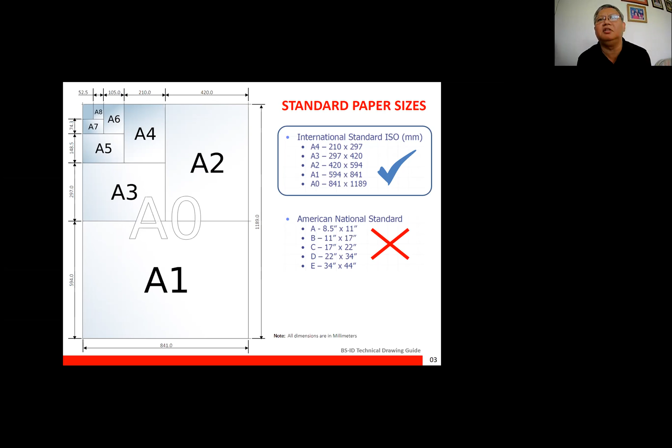Okay, sige. So, anyway, I guess you have seen this guide already. So, iba sa inyo, naging student ko before. So, anyway, this is just a review. Okay, so we'll start out with the standard paper. For your understanding and review, the standard that we are using right now is ISO.

Mga techniques that Prof used to teach American ASME, American Society of Mechanical Engineers. Okay, kasi yun yung mga available books. But there are already standards when it comes to ISO. Wala lang books that teach technical drawing using ISO. So we would have to combine those guides.

So since the Philippines is using ISO as a standard, if you were able to talk or communicate with the Bureau of Product Standards or BPS, they're using ISO. Okay, so pagka tinanong mo sila, they'll basically inform you that for the Philippines, our standard is ISO. Kaya yung mga paper natin, A4, A3, A2, A1 at saka A0.

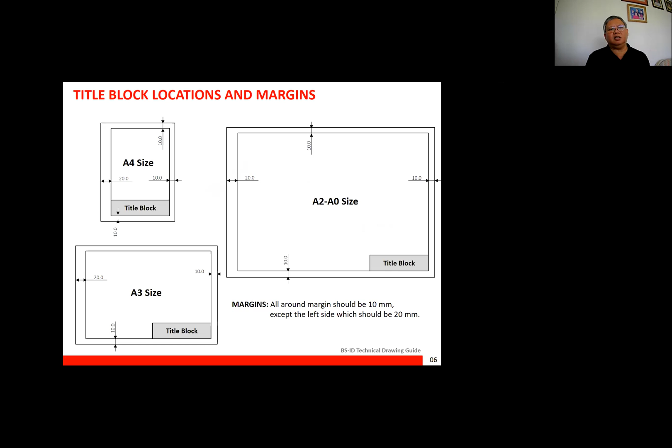Okay? So next is yung standard title block natin. For the standard title block, we have basically decided this already within the school parameters, because of course, as an institution and also as a requirement by CHED, dapat meron tayong mga ganitong guides or manuals when teaching para hindi nalilito yung mga students, so lahat ng technical drawing lessons is isang klase lang, one type lang, walang differences. Okay, so we were able to set these standards as the contents of our title block.

And as a requirement sa mga contents na to, there are minimum requirements of ISO like the institution name, dapat nakalagay yan dyan, and also the name of the designer, then the type of document, dapat meron yan, may part number. Then of course we have to include other contents like yung student number, yung section, at saka dapat may nag-a-approve ng technical drawing. So in this case, your advisor or your professor in drafting. So if I were your professor before, makikita niyo siguro pinipirmahan ko talaga ito or meron akong stamp ng signature; I always made sure na these are all signed properly. Ibig sabihin na check ko siya.

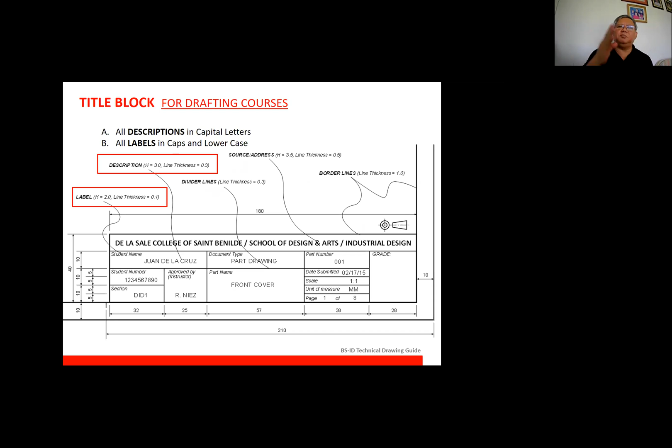Okay, so pages 1 of 8, meaning ilan ba talaga yung total number of documents? Like in your case, sa thesis, ilang pages ba lahat yon? So yun yung 8. Halimbawa, 8 pages lahat. Then may page 1, page 2, page 3. Okay? So it's not used to spread out your drawing in different parts. Dapat when we say one drawing, dapat isang drawing lang per part. Walang part 1, part 1A, part 1B. Walang ganon. So just remember that.

And yung grade, we use this for manual drawing. Okay? And of course, reminder when it comes to the thickness. So may standard thickness ito, yung mga line. So yung borderline natin, ang thickness is 1 millimeter, including the border of this title block. Okay? So ito yung sukat niya, 180 millimeter, di ba? So yung label, may mga height din siya. We have to be particular when it comes to the height.

And of course, for the labels, it can be italic. Separate it from the description. So ito yung mga description. And all descriptions should be in capital letters as mentioned here. So yung labels will be capital and lowercase. So ito yung sukat sa left side, and ito yung sukat ng distinctions. Then this one, yung symbol ng third angle projection, we will discuss that later.

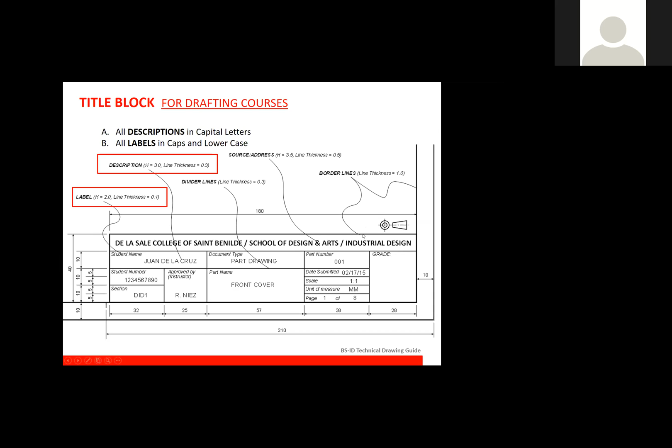Okay? And this is for, as I said, drafting courses. For thesis, we will just move this. Yung grade, malilipat dito sa portion na to, we'll just move everything. And yung grade dito sa right side, mawawala; yung space na yan will be moved to the left to include the Benilde logo. Okay? So it is important for us to have that Benilde logo as a standard.

So ang nilalagay dyan sa technical drawing is yung logo ng institution. Hindi program, hindi yung group or something. It has to be the institution. Okay? So yun lang magiging difference doon. Still, the institution name should be here, up to the department. So naka-slash lang siya, School of Design and Arts and Industrial Design. Okay? So wala pang questions?

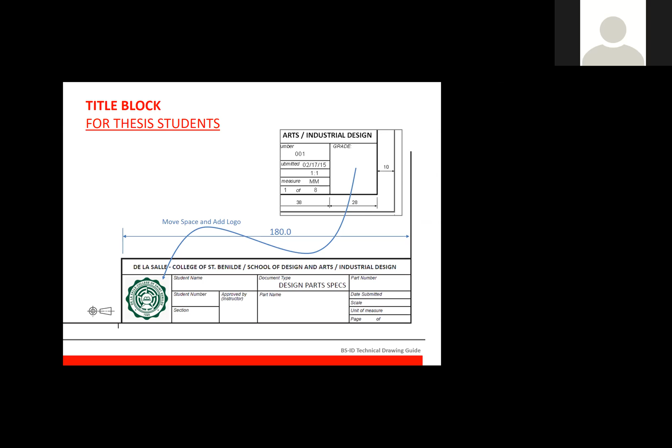Okay, kung wala pa, wala pa? Okay. So we'll just proceed to the next ano. Okay? So after the title block, we'll go to the line types, no? So this is basically standard.

And when you draw, meron tayong tinatawag na yung object. This is referring to the object, no? So there's an outer visible line which is 0.5 in thickness and inner visible line which is 0.3 in thickness. Okay? So ito yung line thickness. So when you use your CAD, you can define the thickness ng points. Or sometimes it is a measurement, no? It's 0.5 millimeter or 0.3 millimeter, then 0.1 millimeter.

Okay? So if you look at this drawing on the right side, yan yung outer visible. Completely external lang, no? So lahat ng outside, this is one way of defining the entire object. So anything that goes beyond that object is already not included in the object. So it could be a description, it could be a label, or it could be another representation of a part. Parang ganun na siya. So it has to be confined with the outer visible. So other details inside will be the inner visible.

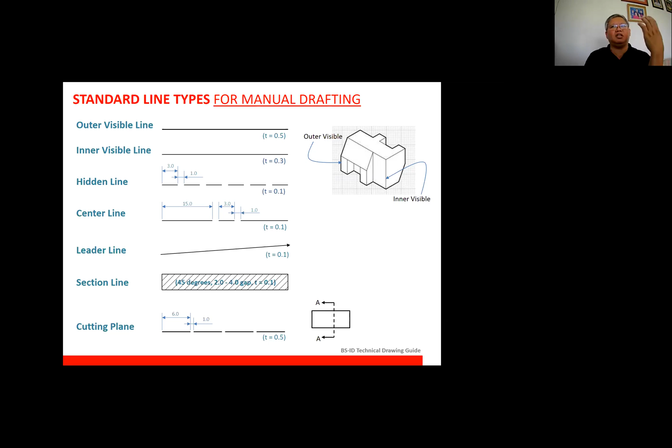The next is dimension lines, which is really important. So for the dimension lines, on the right side, this is for manual drafting. But if you set it with a solid arrow, even just like this - why we do this in manual drawing is because just by defining the thickness as 0.3 and the dimension line is 0.1, it becomes solid at the end, so it can be easily seen. But if you're using CAD, wherein the arrow is already a solid triangle, you could basically use that already. This is just for manual drawing.

So just to identify the parts, this is your dimension line. This is your dimension text, the 15 on top, and this is your extension line.

There's standard spacing for this. Considering this is our object, the dimension has a minimum distance from the object, which is 10 millimeters. That's it - just 10 millimeters. And the extension line should have a gap from the object, which is from 1.0 to 1.5 millimeters. There should be a gap, it shouldn't touch.

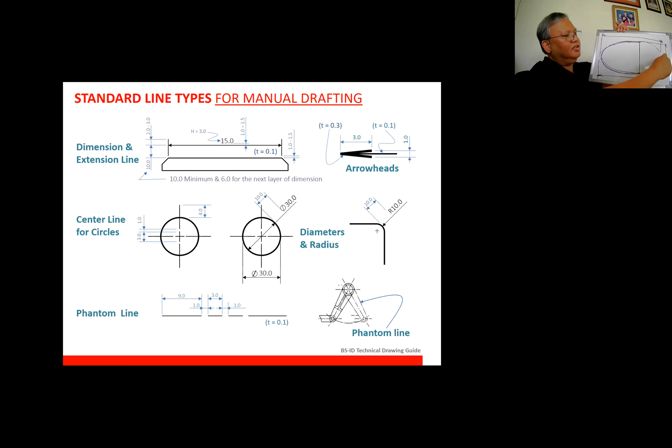Did you get it? Because our object is only this actual part. So for you to be able to generate this ellipse, you need to put a measurement here. You need to add a measurement there. So this line should be a reference line or a phantom line. But your object is only this one. For you to put the measurement or dimension, to generate the complete ellipse, you have to complete the drawing using reference lines.

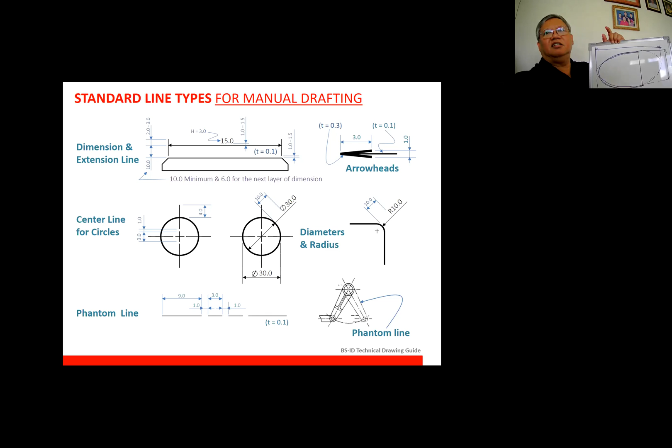Did you get it? Yes sir. So that is one of the purposes of having phantom lines or reference lines. Okay, so if there are no questions here, let's proceed.

So our standard paper size for thesis, as I mentioned, is A2 size. And this is our requirement. This is supposed to be the requirement for the physical submission of technical drawing. But I don't know right now since it's a pandemic, and I don't know with regards to the requirements if your advisor, Ms. Tani, will allow you to submit a physical technical drawing or just a digital one.

It depends on the guidelines of your advisor or the current thesis group ruling, the thesis ruling, so it will really depend on the thesis ruling right now. I don't know yet, but from the last thesis, they were not required to submit physical copies, only digital. But this is still our standard.

So if you'll submit, it should be in PDF if it's digital, with the front title block, that's it. Okay, these are the contents of it. It has to have a front page, then it's attached to the front cover. If digital, it's like a simulation of the front cover. Then for the contents, these are the contents in proper order.

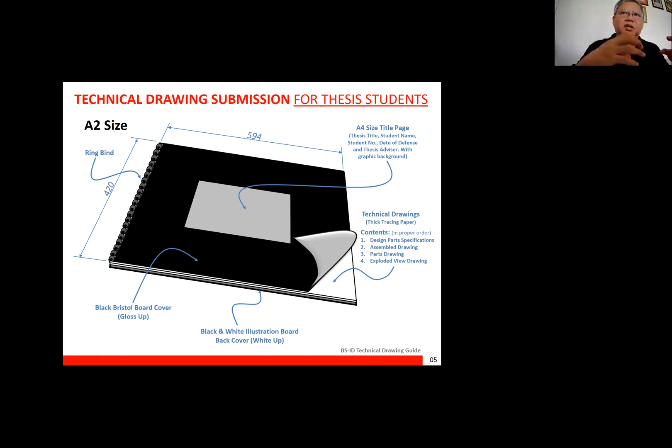Design part specifications, which we will discuss later, these are the contents we'll talk about. Design part specifications, assembled drawing, parts drawing which could be multiple, and exploded view drawing. The assembled drawing is usually just one, but sometimes there are drawings with sub-assemblies, so for you to properly identify those parts, you may have a design assembly drawing for the complete assembly, and another for the other parts. But it's recommended to only have one assembled drawing.

And parts drawing, this is per part. When it comes to part drawing, you're only required to submit part drawings of items you designed originally. If the parts are existing, you don't need to draw it. Just get specifications and part numbers from the supplier, or if you can get technical drawing from the supplier, that's even better. Then the exploded view, which is also required.

So if you are required to submit a physical technical drawing, it should have a Bristol board on top, illustration board at the bottom, then tracing paper in between, and it should be ring bound. A2 size is the standard. This is for thesis students.

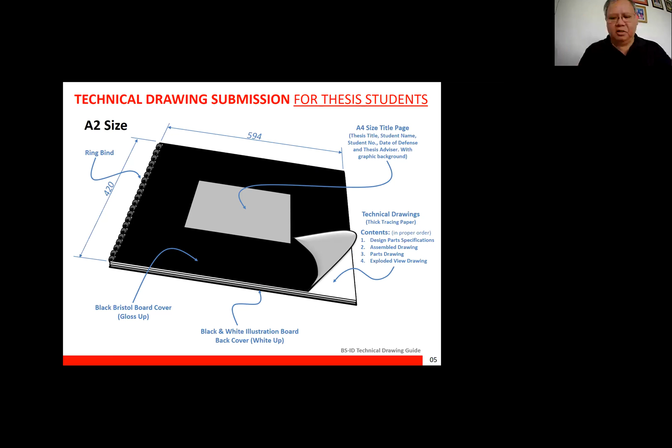Next, no questions here. So anyway, with regards to which is required, please ask your advisor. Ms. Tani is the best person to answer this. Okay, so next is document types.

These are the document types. Design part specification, what is it? It's a document that shows the design specifications of each aesthetic part of your complete product. This could be presented in isometric view of the complete product and exploded view to show hidden parts or parts for assembly to function. This is optional, it depends.

Then parts labelled, described in matrix form. This is for the assembled drawing. Document shows the whole product with parts combined, orthographic and isometric view with minimal dimensioning, meaning it doesn't need to be detailed. Then the part drawing, that one should be detailed.

Document shows details of each part of your product: complete dimensions, sections, details, and descriptions. This is mostly the reference of machinists, fabricators, and molds and dies makers. So it should be detailed.

The details here might be insufficient. Then the exploded view shows how the parts are being assembled. For items with only a few parts, these are placed in the design part specification. You have the whole assembled part and the exploded parts, so you don't have to draw this for simple parts only. But for those with an extensive number of parts, you have to have two: design part specification and exploded or assembly drawing.

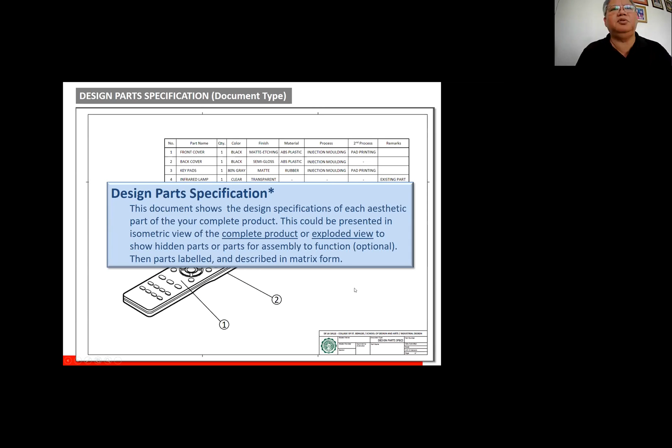What is the design part specification? As I said, it's either a complete product or exploded view, depending. This is the sample, this is the matrix. It has to be identified per part and quantity. So this is the part number. Part 1, part 2, part 3, part 4. This is the quantity per part, because for example the screw, there are many of them, so the quantity can be high.

Then color. Since this is a thesis only, and if you want to impress your jurors, you can put here like Pantone color, process color. It's not just this simple.

Then the finish - of course there are different finishings: matte finish, glossy, etching, sandblasted, mirror, and also transparent or clear transparent. What material is it? ABS plastic, PP, or if it's metal, aluminum, steel, CRS steel - cold rolled steel, or rubber, or any material.

Then it has a process - how it's made - and there's a second process. For the process, like in this case, injection molding. There are many kinds of processes involved. You'll learn that in your industrial studies, the materials. So those are the processes. And the second process is the process on top of this, like for example pad printing, silk screen printing, or if aluminum, there's anodizing, there's painting.

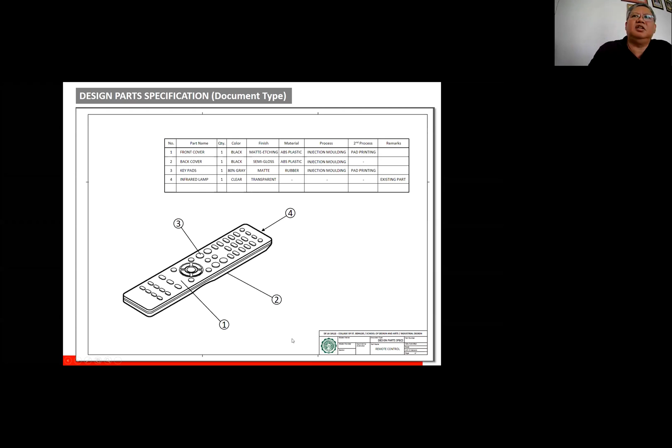So next, what is the assembled and part drawing? The assembled drawing is of your whole part as an assembly, complete, all together - like if it's a wheelchair for example, it's not separated, it should be one whole piece. So the complete measurement, like the height of the seat, that's it - minimal dimensioning only. It doesn't have to be dimensioned completely, but the major parts too, like for example if it's a wheelchair, the diameter of the wheels, just put that. But the details of the wheels, you don't need to specify those - only minimal dimensioning.

It doesn't have to be too detailed because that's only the reference for when the product is fully assembled. Then for the part drawing, that's a drawing that has to be detailed already, because this is the reference for the injection moldings, for the machinists who will make the parts, who will cut and process them.

For them to be able to generate that part. Okay? So yung assembled drawing hindi detailed because it's only used as a reference for assembly. No? Sir. Nabuo na siya.

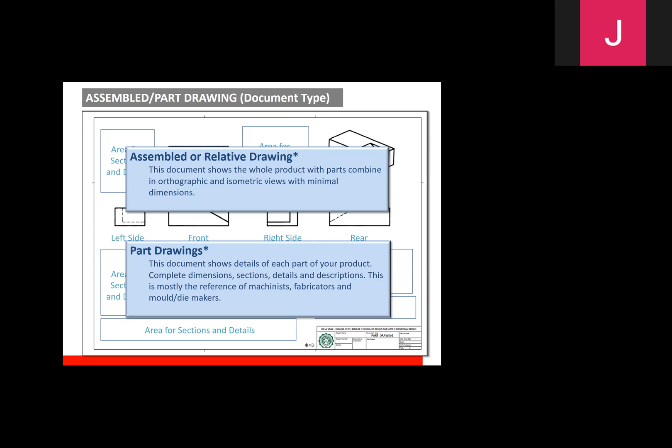Okay? Sir, question. Yes. Sir, for the assembled drawing, do we need to use hidden lines to show what's inside or hindi na? Only if necessary. Minsan hindi na kinakailangan. Okay? So if the hidden lines would basically disrupt the image of your drawing or will only confuse yung magbabasa ng drawing, better not to put it, no? You only put it there if it is necessary, and usually it is necessary in parts drawing, no?

But if doon sa parts drawing, sobrang dami na rin ng lines and it confuses, you could basically eliminate it. Pwede mo ilagay lang doon yung hidden lines that are relevant, no? Para ma-identify nila or maintindihan nila yung part na yon. Okay? So it's not required for hidden lines to be always there, no? Kung necessary lang. All right. Thanks, sir. Okay? Sige.

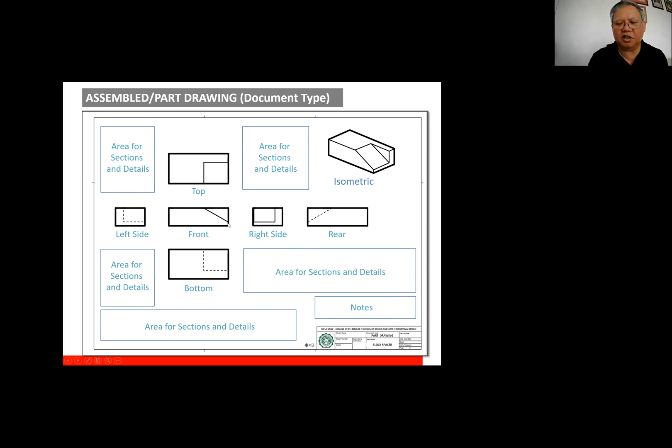Okay? So, kinakailangan nito may third angle projection. So, ano ba yung third angle projection, no? Ito siya, yung symbol na to. Okay? So, if you're looking, ito yung mga sample no? Actually, yung third angle is commonly used for American National Standards, no? Sa ISO kasi baliktad. Okay? Pero since ISO tayo, no? And nasa Asia tayo, wherein we're more familiar with the third angle projection, we could actually use it.

Okay? So ito yung symbol naman pag first angle. Okay? So ito yung parang front, ito yung right side. Dito sa first angle, yung right side mo nakaposition sa left. Okay? Pero ito pa rin yung front mo. So baliktad lang sila in that aspect, no? Parang ganyan siya. And sa Europe, halimbawa, Europe ang market mo, ang client mo, ang drawing mo dapat is first angle. Kasi they're more familiar with that sa Europe. Kasi doon nagsimula yung ISO. But if your client is Asia and the United States, dapat third angle ang gamitin mo.

But since we're here in the Philippines and we're more familiar with the third angle projection, it's best to use the third angle projection. Kahit hindi siya ISO. Okay? So kaya nga may symbol na ganito, that means ISO, ina-allow niya yung, you just need to identify kung anong type of projection siya. And this applies to all orthographic drawings. Okay? So pagka isometric or pagka exploded view, hindi na siya orthographic, dapat wala na itong symbol na to. Okay? So pag orthographic lang to.

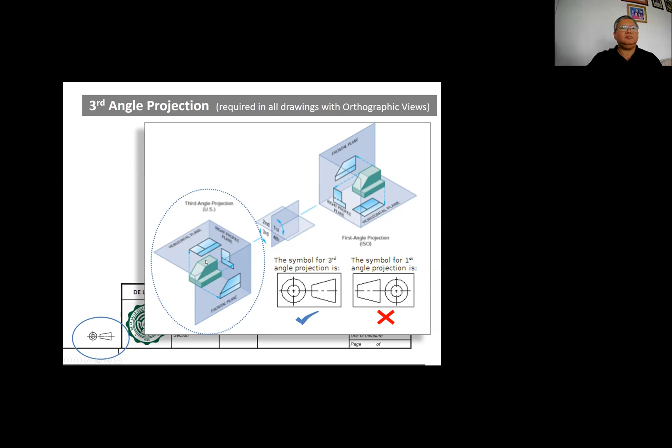Okay? So those are the two common projections. Wala nang second, wala nang fourth. Okay? So first and third lang sila. Okay? So ito pang sample, no? Front, top, yan yung third angle, right side nandoon. So first angle, no? Yan yung right, no? Nandito. Yung front, yun pa rin, tapos ito yung top sa baba. Okay? So yan ang differences niya.

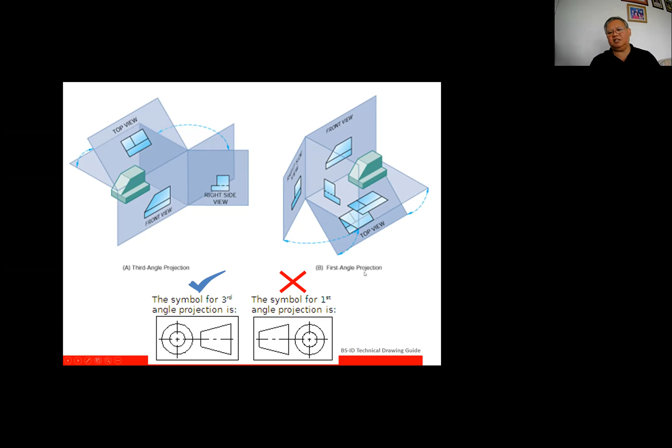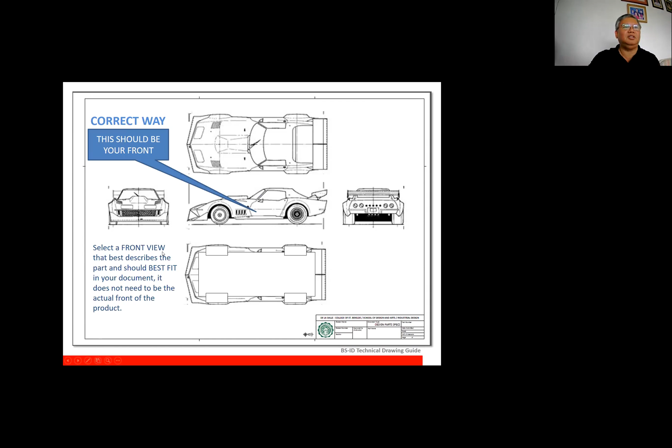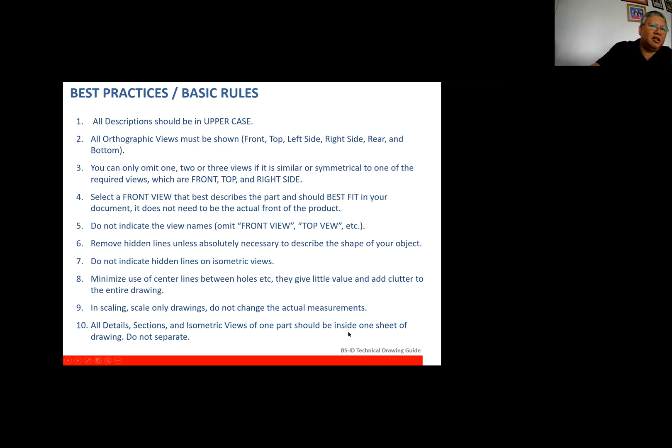All details, sections and isometric views of one part should be inside one sheet of drawing. So yun ay sinabi ko kanina. Don't do page 1, page 2, page 3 of one part. Okay? Sige ba? So balik tayo dito.

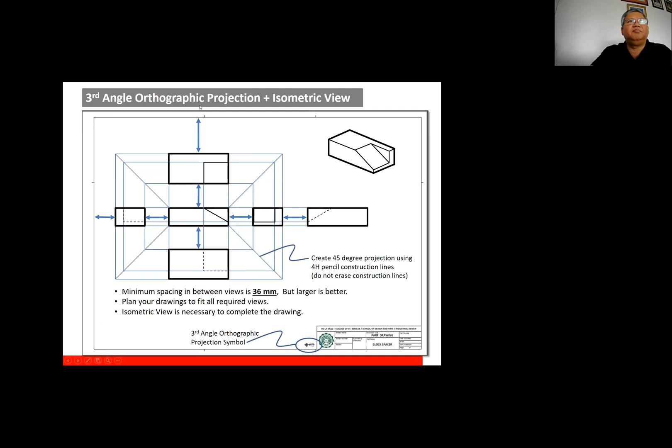You always dimension, no? Yung iba kasi may nakukulangan ng dimension. Bakit? You have to put dimension based on how it should be manufactured, no? Like for example, kung ifa-fabricate siya. Okay? So you start out with a block. So yung block na yon, gagawin mo muna as a full dimension. So dapat may full dimension ka nun.

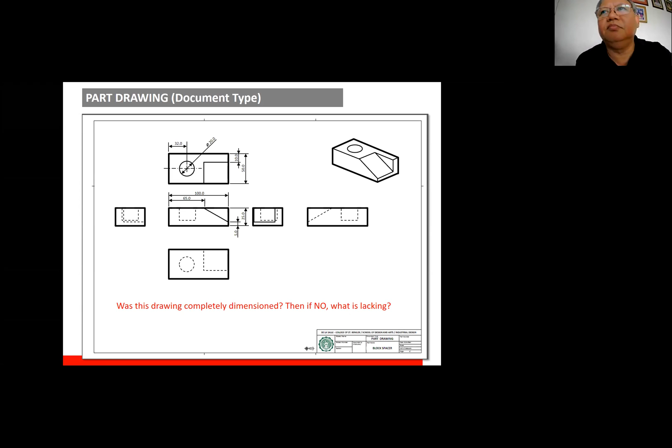So guys, baka yung iba dyan natutulog na. So tignan niyo yan. Please look at this drawing. Please check what dimension is missing.

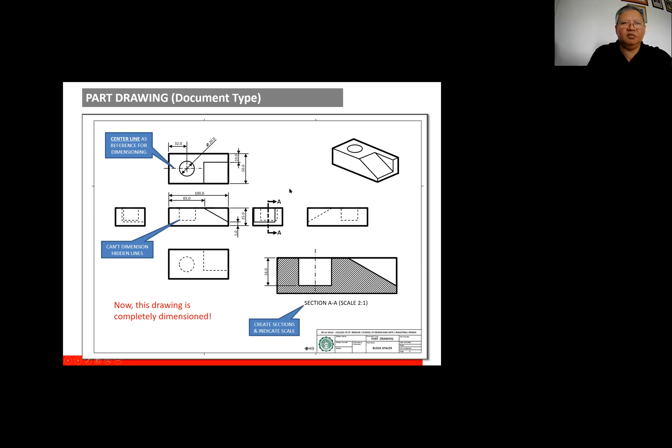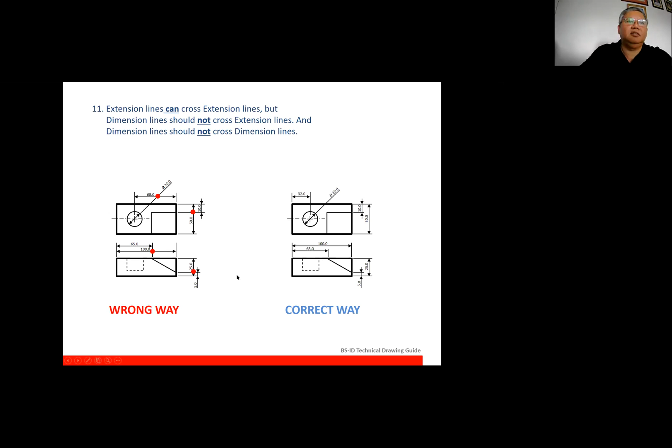Okay, pag nagda-dimensioning na kayo. Merong question dito? Wala na? Okay, sige. Next is another rule of dimensioning.

All dimensions in decimals. Bakit? Dapat may point, even decimal siya na 0.2, 0.3, dapat may 0 naman sa harap. Pero kasi nagda-dimension, walang 0, na nakalagay .5. Kasi sa American National Standards, ganun sila maglagay ng dimension. Pagka ISO, may pagka-decimal, may 0. O kaya pagka-decimal number lang siya, like 0.2, 0.3, dapat may 0 sa harap.

Okay? So bakit kinakailangan naka-decimal? Kasi related yan doon sa rule number 13, which is yung multiple dimensioning. Kasi yung number, when multiple dimensioning, should be definite, ibig sabihin walang decimal.

Kasi may nagda-dimension, kasi ito pwede magpalit yan: 9 multiplied by 10.0. Pwede yan, pero dapat may diameter. Pwede ring diameter 10.0 times 9. So ito, kung titignan nyo, ito yung isang rule natin na yung center line, ito lang nilagyan ko kasi.

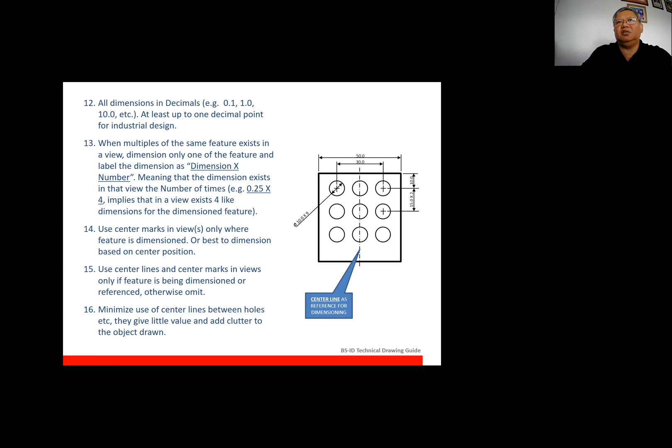Okay, so yun yung sinasabi natin. Para malinis yung drawings, lahat lang ng kinakailangang lagyan ng center line marks are those holes or circles that are dimensioned.

Okay, so other rules: use metric unit of measure. Kasi nga ano tayo, ISO tayo, but of course we have clients wherein English ang ginagamit as reference. Like for example, they're using for furniture, inches ang ginagamit. Halimbawa sa construction, availability of construction materials, inches.

So hindi pa rin pwede tanggalin yung metric number. Pwede mo lang lagyan ng open close parenthesis, tapos ilagay mo yung inches. Okay, so makikita pa rin nila yung measurement in inches, o kaya feet. Halimbawa feet yung reference, kasi halimbawa yung board feet na plywood ang reference, so they're using inches. Okay, so please open close parenthesis lang yung inches, pero dapat nandun pa rin measurement ng millimeters.

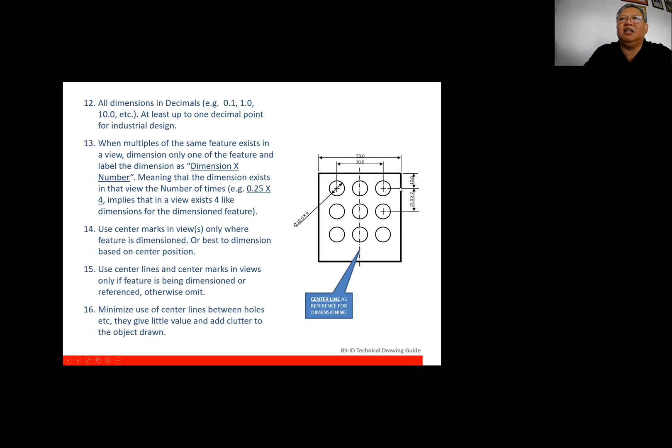Do not indicate mm in all dimensions. All dimensions should be in millimeter as indicated in the title block. Some students put mm on every dimension line, like 50 mm, 30 mm. That's not needed anymore since it's already indicated in the title block that everything is in millimeters. So just put the numbers.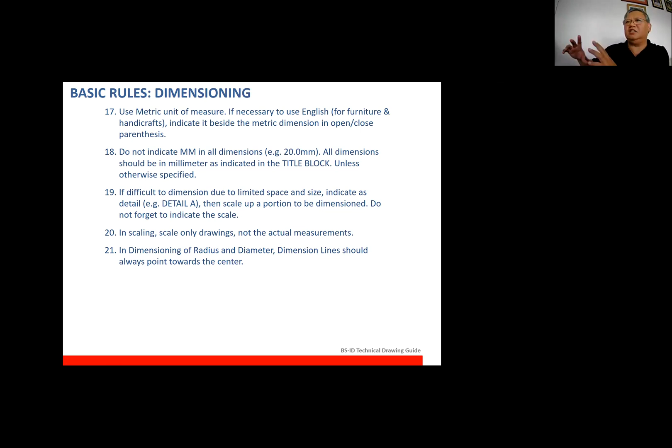If it's difficult to dimension due to limited space and size, indicate it as a detail, like what I showed earlier. If the detail is too small to put dimensions on, make a separate detail view. Put a circle on it, then enlarge that circle in a vacant space on your drawing, and label it Detail A, showing that enlarged circle as Detail A. Then put the scale in parentheses - scale is 5:1 since you enlarged it. Please always indicate the scale, since in scaling, the scale refers to the drawing, not the actual measurements.

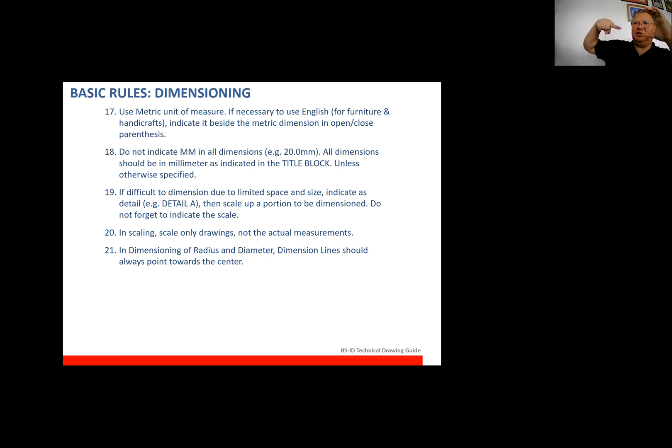As we've said before, in dimensioning radius and diameters, dimension lines should always point towards the center. This is no problem if you're using CAD since it's automatic, but for manual drawings, students sometimes make mistakes - they point to the top part of the circle but place the dimension at the bottom. It should point toward the center, following the pivot of the center line for radius and diameter dimension lines.

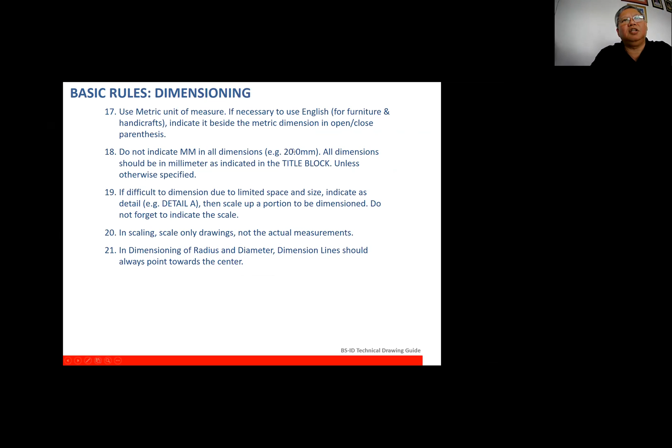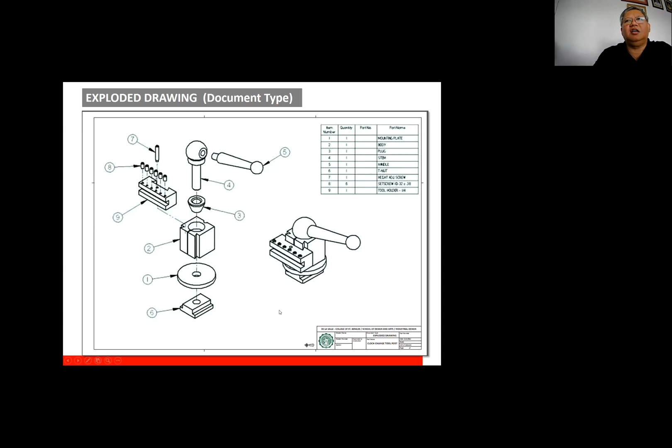Do you have questions regarding the contents?

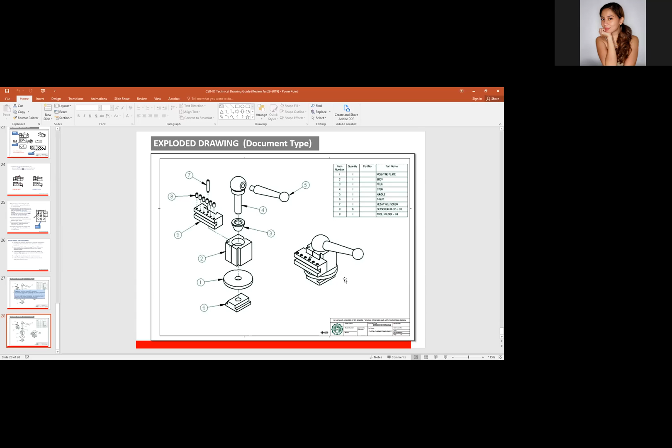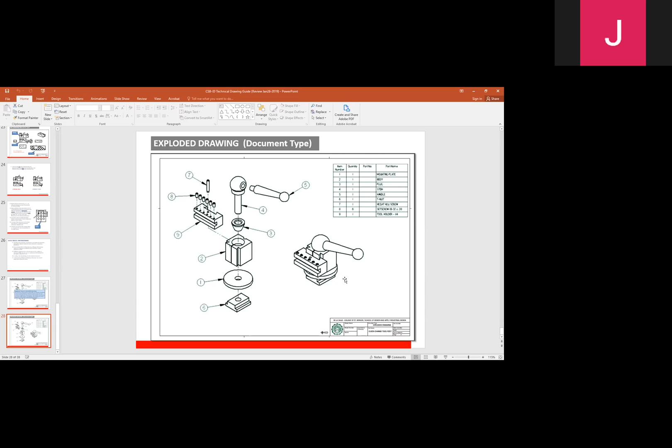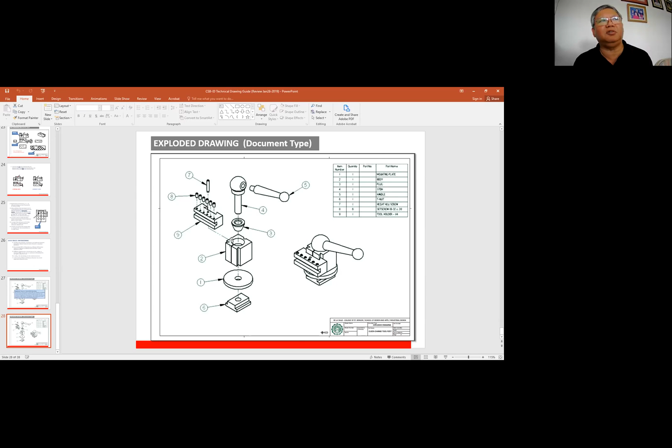Meron pa bang tanong? Sir, if may exploded na yung part specification, kailangan pa ba yung exploded drawing separate? Wala na, minsan ganun yung ginagawa ng iba. Kasi doon sa exploded view, pinagsasama na nila yon. Kung naipagsama mo na yon, pwedeng wala na. Halimbawa, complete parts nakikita mo na doon.

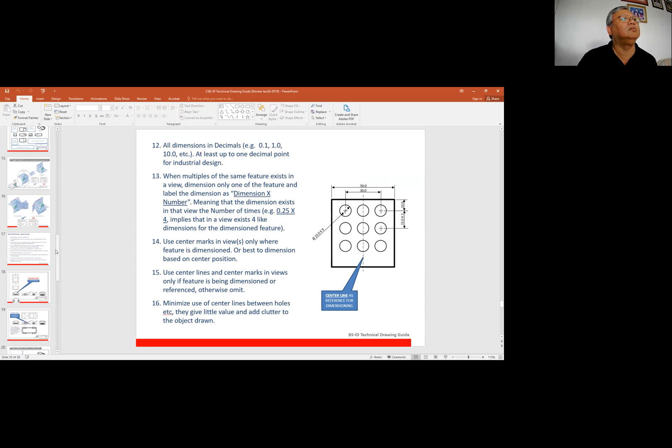Dito, when we're talking about design part specification, minsan may mga parts na aesthetically rin pero hidden siya. Ibig sabihin, yung part na yon can be disassembled by the user based on function. Halimbawa, we're talking about coffee maker. Siyempre meron siyang filter, pangsalo ng hot water, tapos may lock siya rito. And those can be seen by the customer when cleaning. So ginagawa na nila doon sa part specification, bini-breakdown na nila yon.

If those are all your aesthetic parts na, and it's already seen in the part specification, nakikita na siya rito kasi exploded na siya. Yun lang medyo mahaba itong matrix mo, you have to fill that in. So pwede pa rin, it's best to not draw the exploded view, ilagay mo na lahat dito yung exploded mo sa design part specification.

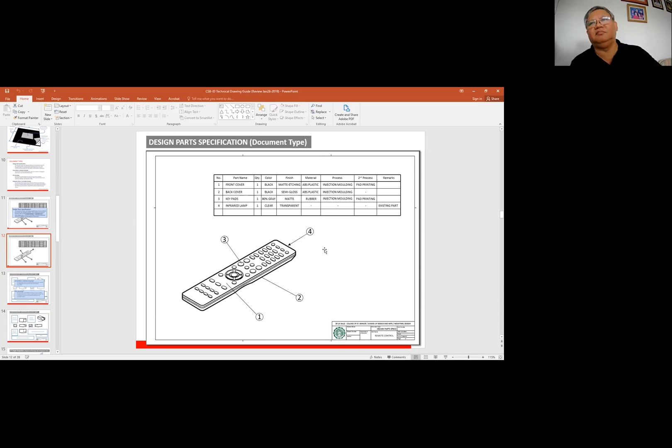May questions pa ba? Kaya dito sa rule natin sa baba, nakasulat naman yan dito. Ito pala, nandito pala sa part specification. This could be presented in isometric view of the complete product and exploded view to show hidden parts or parts for assembly to function, then labeled and described in matrix form. Nandiyan na siya.

Nakasulat dito, this is optional for thesis students but required for technical drawing lectures. Siguro hindi ko pala naisama rito yung explanation na yon. Anyway, pwede siyang wala, pwedeng wala itong exploded view if it's fully described doon sa part specifications na.

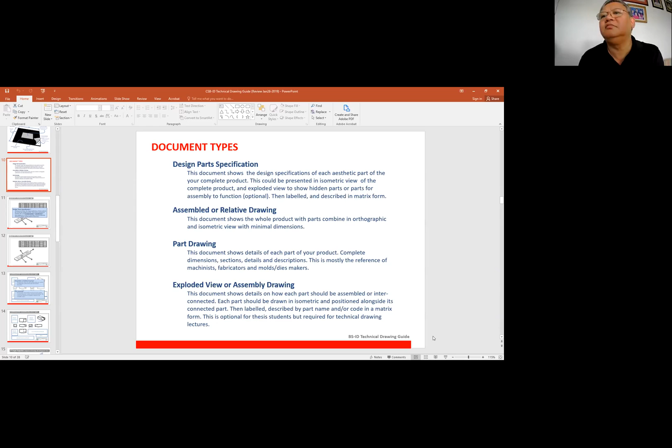Wait lang sir, tingnan natin. Asan kayo? Questions? Miss Anyone? Tani, ano ba ang dapat nila i-submit?

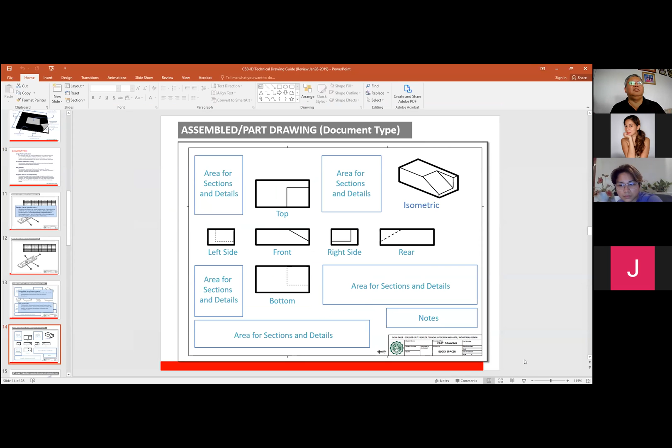Digital na, wala nang kailangan i-print. Sir, sa ngayon naka-digital pa rin po, kasi wala pa naman nga tayo talagang face to face, ang ano pa rin digital para na rin hindi sila maglalabas at pumunta ng mga printing shops. Kasi sir, hindi ito pa naman rin yung kasama sa archives yung A2, ang kasama lang sa thesis book naka A3 na. So yun na lang yung papaprint nila if ever wala silang A3 printer sa bahay.

Pero dapat kasi A2 size pa rin ang format, ibig sabihin in the case of the jurors, it will be provided kasi i-evaluate nila yung technical drawing. So dapat naka-base pa rin dun sa A2 size, pati yung proportion, yung size ng title block, even the thickness, dapat ang reference niyo is yung A2 size. Okay, tapos ito yung magkakasunod. When you do save it in PDF, yun ang suggestion ko, you save it in PDF para easily accessible ng mga jurors, may front page ka pa rin describing the product.

Ito yon, yung title page mo. Tapos, second page mo dapat yung part specification. Then next is assembled drawing. Then parts drawing ng lahat ng parts. Then exploded view drawing. Yun yung nasa dulo, exploded view.

Okay? So I suggest in your front page, yung title, pinaka-title page nyo, ipakita nyo yung 3 dimension ng product. Yung parang yung 3D ng product. Pwede siyang silhouette, tapos yung name, student name, no? This is title, tapos yung date of defense, tapos advisor, at saka ito yung graphic background na pwede siyang yung 3D image ng entire product mo. Okay?